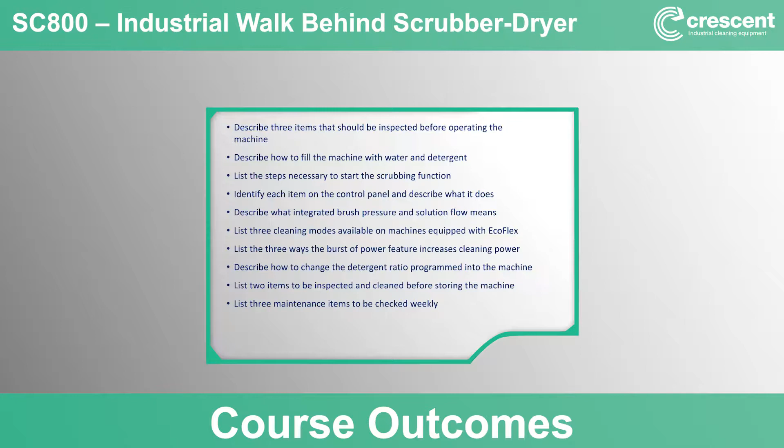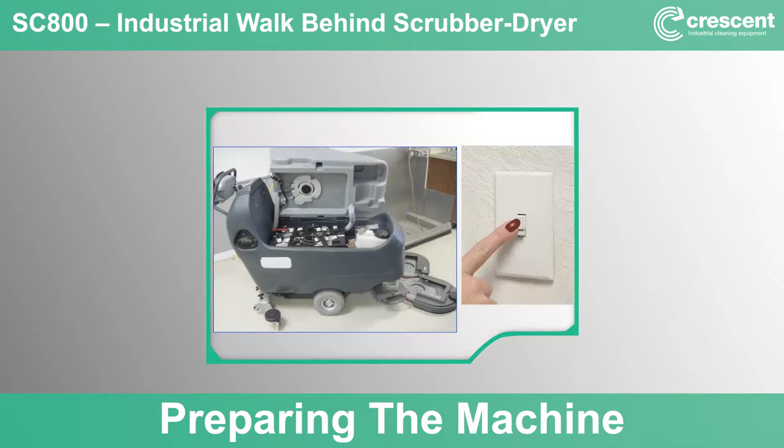Before one can begin using the machine, it has to be prepared for use. Let's start from the very beginning by turning on the light in the room in which the machine is stored. The first thing you should see is the machine parked with the recovery tank open, the battery charger plugged into the machine, the pad drivers or brushes laying nearby, and the squeegee hanging on the back of the machine. This is how the machine should have been left after it was used last.

The first step is to unplug the battery charger. If the machine is equipped with an onboard charger, the charger cord should be stored using the convenient cord wrap on the back of the machine. During charging, the recovery tank should be left open for air circulation. Now the recovery tank can be lowered to its normal operating position.

The next step is to inspect the pads or brushes. These should have been rinsed the last time the machine was used, so they should be relatively clean and free from any large debris. Inspect the pads or brushes for wear and determine if there is enough brush or pad life for the scrubbing you are about to complete. And if not, replace the pads or brushes as needed. Also make sure you have the correct pad or brush type for the scrubbing that needs to be performed.

Rev machines feature a fixed pad driver with hook material on the bottom of the pad driver. To install a pad, simply slide the pad under the deck and lift it up and press it onto the hook material. Do not remove the center section of the pad. When using the machine to remove floor finish, install a new red pad and then attach the double-sided Velcro, which is an option for the machine. Now the maroon pad could be attached to the red pad. The maroon pad should never be attached directly to the pad driver. This will damage the pad driver and it will have to be replaced.

To install the rev brush, follow the same procedure, but now the brush is going to be attached with threaded inserts. Lift the brush up and line up the fasteners on the brush with threaded inserts on the pad driver and attach it.

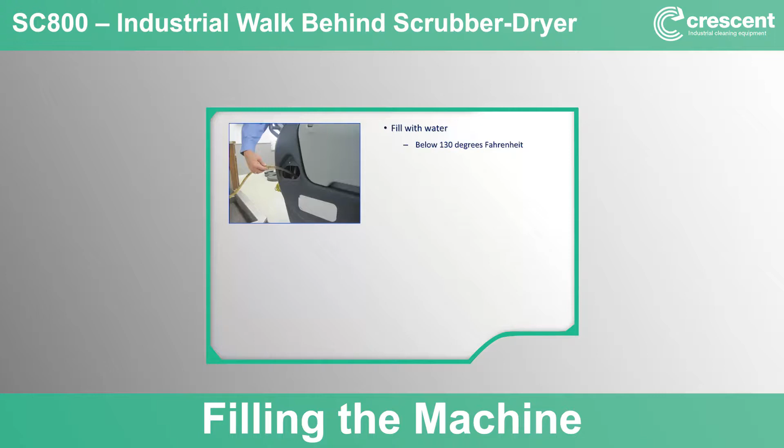On EcoFlex machines, fill the machine with clean water and then inspect the EcoFlex detergent cartridge. Verify the correct detergent is in the cartridge and there is enough detergent in the tank to complete the scrubbing task at hand. We are now ready to transport the machine to the area to be cleaned. Turn on the machine using the key and verify that the machine has enough battery power to complete the scrubbing task at hand. You can see this by using the control panel battery gauge.

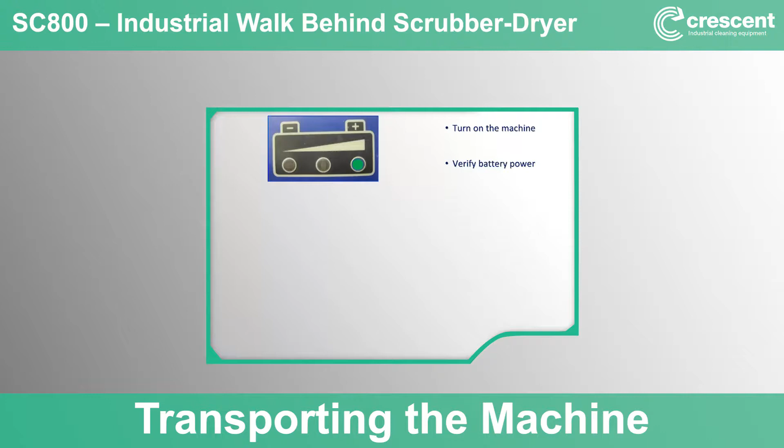The machine is controlled using the safety paddle system and a maximum speed control potentiometer. The potentiometer sets the maximum speed for both forward and reverse. Set the potentiometer about halfway between the slowest and fastest speed. The safety paddle system controls the direction and speed of the machine. Push the paddle forward to go forward and backward to go backward. The safety paddle system gives you variable speed control, meaning that the farther the paddle is pressed, the faster the machine will travel until the maximum speed is reached, which again was set with the maximum speed potentiometer.

The ST machines again feature a maximum speed control potentiometer, however they're controlled a little bit differently. On each side of the handle is a palm switch that engages the drive motor. These palm switches are not variable speed, they are simply on and off switches. Again, set the speed control at its middle position and press either the left or the right or both palm switches to go forward. To go in reverse, the small white reverse switch located on the top of the handlebar must be pressed while one of the palm switches is also pressed.

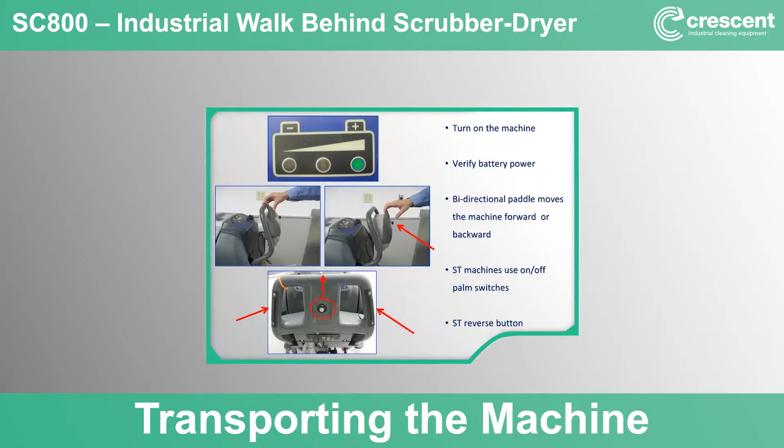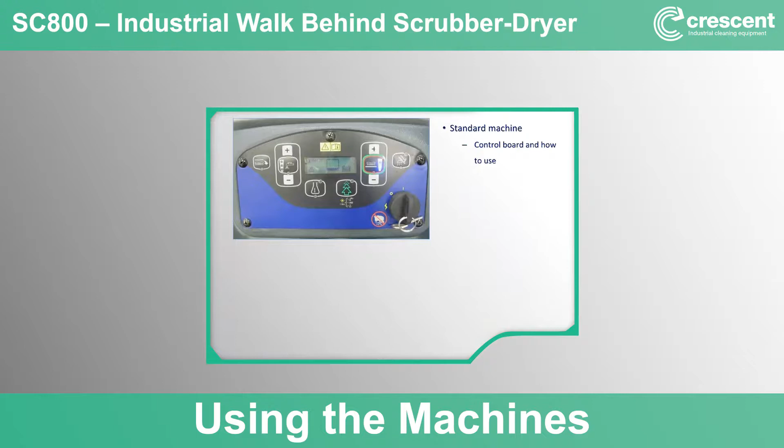Preparing the machine for use is the same for both the standard and ST machines. However, using the machines and the functions of the control boards are very different, so I'll cover them individually. I'll start by first describing the control board of the standard machine and then move on to the ST machine. The standard machine control board is equipped with a graphical display that shows at a quick glance some of the key information needed by the operator.

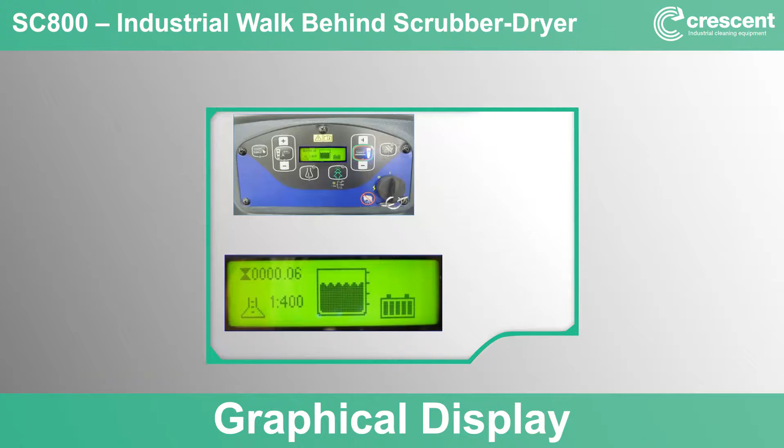Right in the center is the solution level display that shows the user how much clean water remains in the solution tank in 5 increments: full, 3/4 full, half full, quarter full, or empty. This can be useful to determine if the machine needs to be refilled before moving on to another area to be scrubbed. The battery gauge shows the amount of charge remaining in the battery pack. On EcoFlex machines, the current detergent dilution ratio is shown on the display.

The hour meter shows how many hours the machine has been used for scrubbing. And the machine has a complete diagnostic system, so any problems with the machine will be shown in the display with an error code. Under the recovery tank is a decal that gives some basic troubleshooting advice should an error occur.

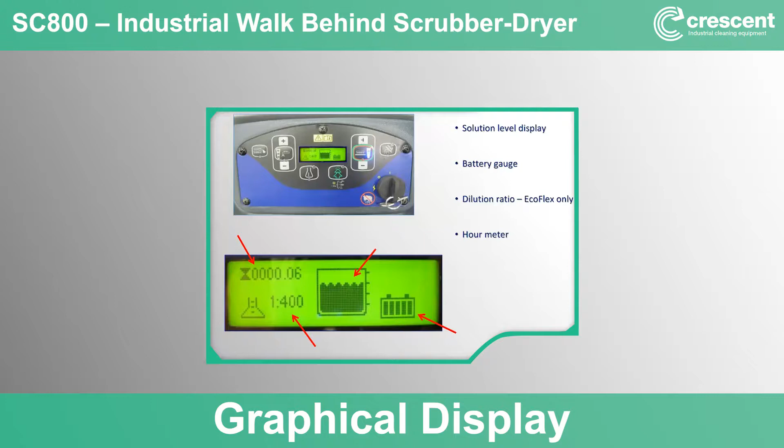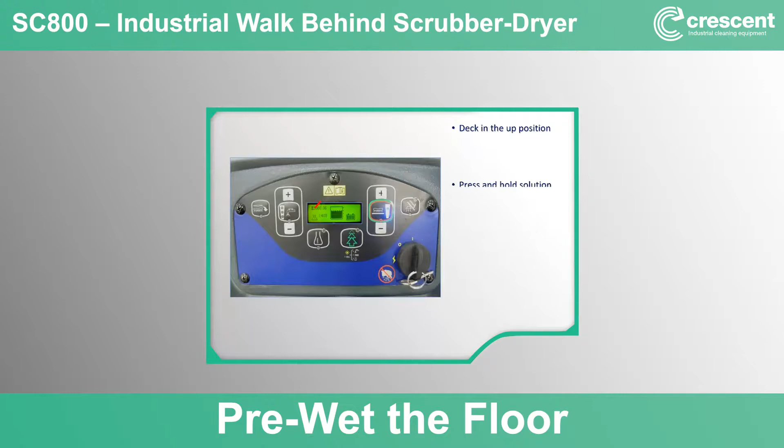To begin scrubbing with the machine, press and hold the solution on-off switch with the deck in the up position. This will dispense water to the floor to pre-wet the brushes and the floor, helping to prevent any donuts. The best practice to prevent any damage to the floor when starting or stopping scrubbing is to have the machine in motion slightly, then press the scrub on and off switch.

To make the standard and ST machines simple to use, they feature true one-touch scrubbing. The press of a single button both starts and stops the scrubbing function. The button is color-coded with both the green and red border, which makes it really easy to use. Everyone knows that green means go and red means stop.

To start scrubbing, press the true one-touch scrub button, which will lower the deck to the floor and prepare all systems for use. Then lower the rear squeegee. Depressing the safety paddle forward will start the actual scrubbing function. The machine will move forward, water will begin to flow, the brushes will begin to spin, and the vacuum will turn on. To pause scrubbing, release the paddle, and the machine, solution flow, and brushes will all stop.

The vacuum will stop after a 10-second delay to help clear any remaining water from the vacuum hose and prevent it dripping back on the clean floor. To stop scrubbing, simply press the one-touch scrub button again and the scrub deck will lift from the floor and the vacuum will shut off after a 10-second delay. Then raise the rear squeegee.

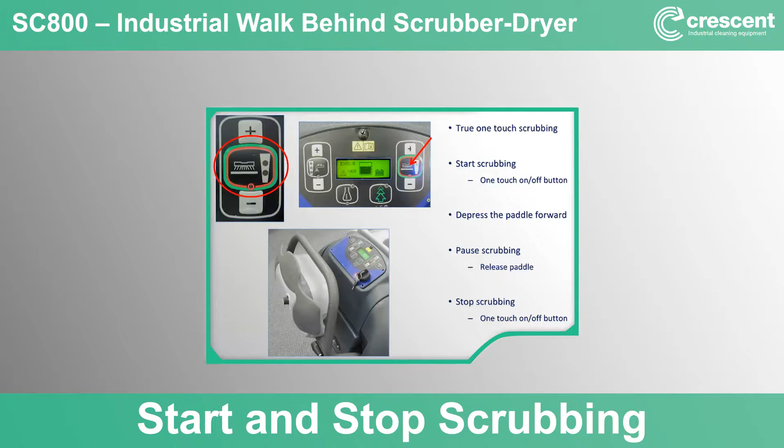You can easily adjust the cleaning power of the machine because it features integrated scrub pressure and solution flow rate control. Advance has taken the guesswork out of scrubbing through smart engineering. We've calibrated the correct combination of brush pressure and solution flow rate to clean regular and extreme soil loads on the floor. Regular scrub is indicated by one scrub pressure LED and one solution flow rate LED.

To clean extreme soil loads, you need extreme pressure and more water. Extreme scrub is indicated by lighting both scrub pressure LEDs and two solution flow rate LEDs. Now let's see how easy it is to change and adapt the scrub power to the varying soil loads on the floor.

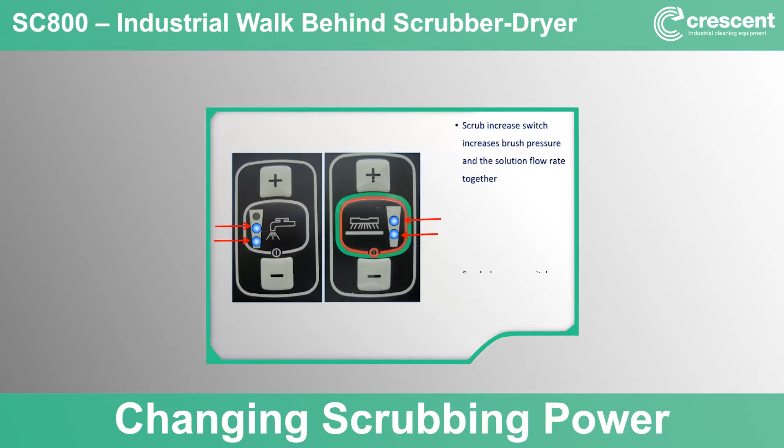To change from regular scrub to extreme scrub and back again is very simple. Simply press the scrub increase switch to increase cleaning power. When this is done, both the scrub pressure and the solution flow rate increase simultaneously. To decrease cleaning power and return to regular scrub mode, press the scrub decrease switch and the lowest scrub pressure and solution flow rate LEDs will now be lit.

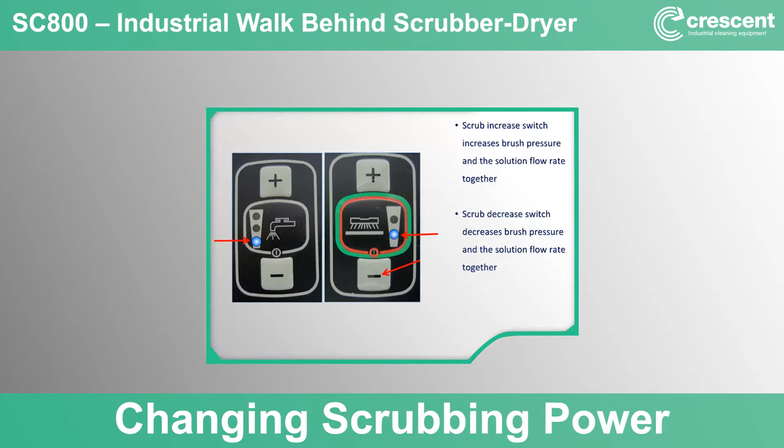Because Advance uses smart engineering and integrated scrub pressure and solution flow rate for you to clean different soil loads on the floor, there's seldom a need to adjust the solution flow rate independently. If the solution flow rate does need to be adjusted, it's simply a matter of pressing the solution flow rate increase switch or the solution flow rate decrease switch. Just like turning scrubbing on and off, you can also turn the water on and off. Pressing this button will turn the water either on or off.

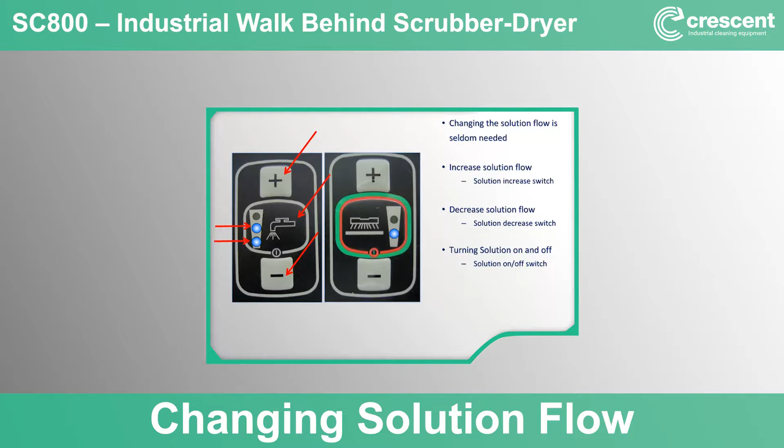The next two slides are for those machines equipped with the Advance EcoFlex system. If the machine is not equipped with the EcoFlex, the detergent on-off switch and the EcoFlex switch will not be active. The EcoFlex system is a flexible cleaning solution that meets all of your floor cleaning needs from green to clean. EcoFlex allows the use of plain water whenever and wherever possible for the lowest cost to clean with zero environmental impact from chemicals.

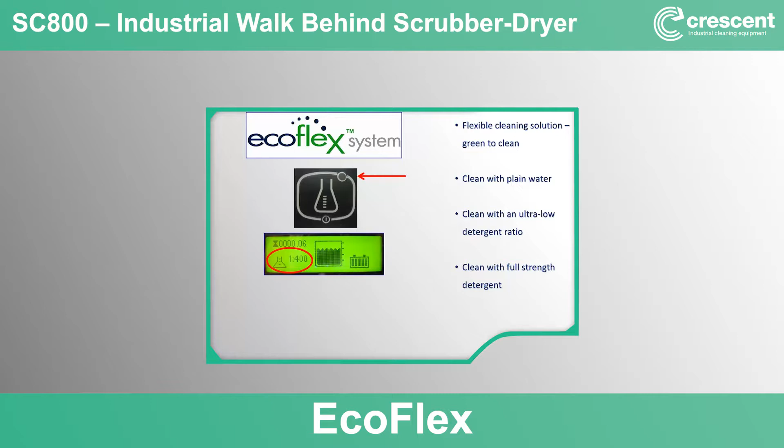EcoFlex has an ultra-low detergent dispensing mode that enhances the natural cleaning power of water while minimizing detergent costs and the environmental impact from chemicals. EcoFlex gives you the flexibility to clean with detergent at full strength if that's required. And on top of all that, there's a burst of cleaning power at your fingertips for tough soils found in smaller areas to clean. Now let's see how easy it is to clean from green to clean.

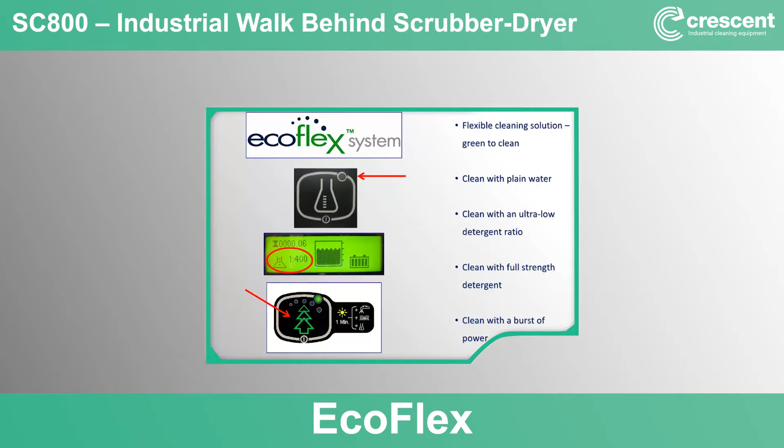Cleaning with plain water. Every Advance scrubber with an onboard detergent system has a detergent on-off switch. This gives you the flexibility to turn detergent off and clean with plain water, or turn detergent on and increase the cleaning performance, and it's all done with the touch of a button.

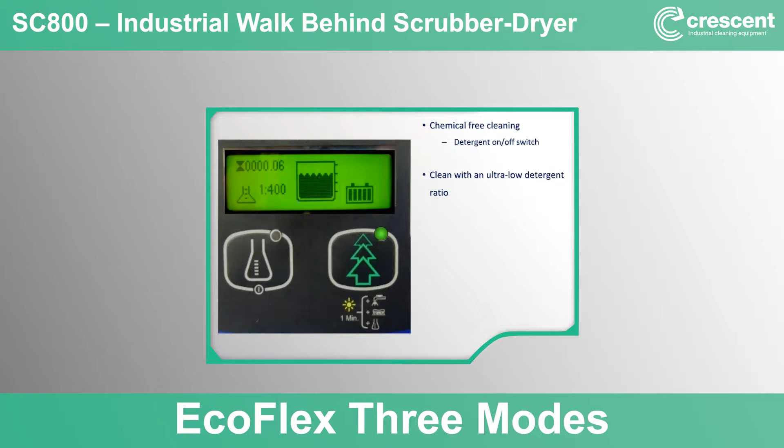Cleaning with an ultra-low detergent ratio. Some areas might require a bit more cleaning power than pure water can deliver. Water cleans pretty well, but using a little bit of detergent enhances the natural cleaning power of water and makes it a more powerful cleaner. In most cases, when detergent is turned on, the machine will dispense at a ratio of 400:1. This is the ultra-low detergent mode. 400:1 will be shown in the graphical display.

Cleaning with full-strength detergent. Switching to full-strength detergent for the heaviest of soil loads on the floor is very easy. Press and hold the EcoFlex switch for 2 seconds. You'll see the ratio change on the graphical display from 400:1 to the ratio that's been programmed into the machine. You'll also see the EcoFlex LED be extinguished.

Note that the machine will continue to dispense at the ratio that's programmed into the machine until the EcoFlex switch is pressed again. So how does one take advantage of this flexibility? Well, let's take scrubbing a high school as an example. Many areas in a school are simply being damp mopped with the machine. In these areas, take advantage of cleaning with plain water for the lowest cost to clean with zero environmental impact from chemicals. When the machine approaches a slightly dirtier area, turn detergent on.

When encountering a severe dirty area like a cafeteria, press and hold the EcoFlex switch and clean with full-strength detergent. After the cafeteria is cleaned, one can switch back to the ultra-low detergent cleaning mode or go back to plain water. Some follow a cleaning routine where the school is scrubbed Tuesday and Thursday with plain water or in the ultra-low detergent mode, and then cleaned Monday, Wednesday, and Friday using full-strength detergent. A cleaning schedule like this will reduce the overall detergent consumption, saving money and the environment.

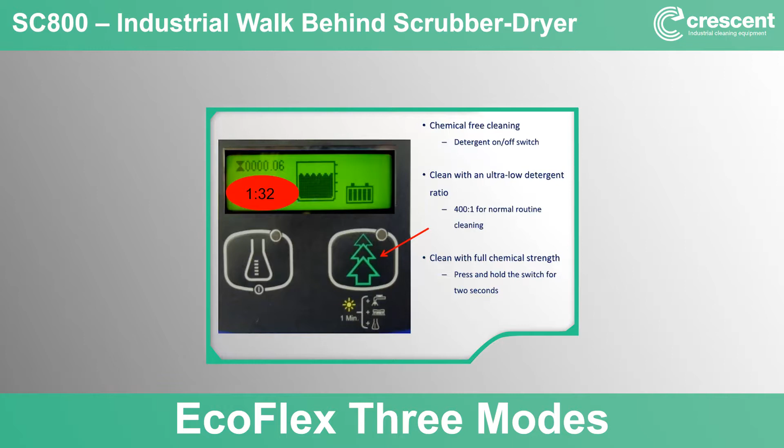Now let's see how the burst of power makes spot cleaning in areas super easy. EcoFlex provides the flexibility needed to clean from green to clean. The flexibility to clean green and in the most environmentally responsible way by using plain water. The flexibility to use detergent sparingly for slightly dirtier areas and to engage full-strength detergent only where and only when it's needed. Now let's look at the flexibility the burst of power feature brings us.

For smaller, dirtier areas, the operator can easily and temporarily increase the cleaning power of the machine for 60 seconds by simply pressing a single button. This can be used to call up additional cleaning power when needed, such as when cleaning up the spill that has now dried onto the floor, or maybe the front entryway to a hospital has become extra dirty and more cleaning power is needed to get it clean.

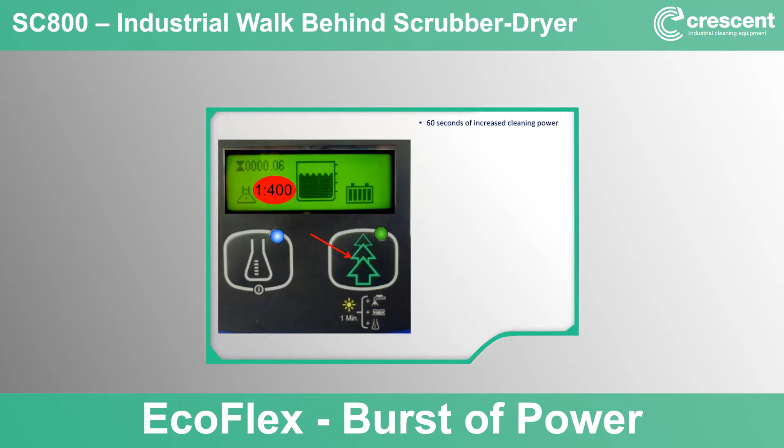The burst of power temporarily increases cleaning power for 60 seconds in 3 ways. It increases the detergent strength to full detergent strength. It increases brush pressure 1 level, and it increases the solution flow rate by 1 level. During this timed interval, the LED on the switch will blink. It blinks slowly at first for the first 50 seconds and then blinks fast for the last 10 seconds, indicating the burst of power will soon end.

After 60 seconds, the machine automatically reverts back to the original detergent dilution ratio, brush pressure, and solution flow rate prior to engaging the burst of power. One thing to note is that to clean a dirtier area, we all know that more detergent, brush pressure, and solution is needed. That being the case, if the operator was cleaning with plain water, tapping the burst of power button will turn detergent on for the 60-second period, and then it will turn detergent off again after the burst of power has expired.

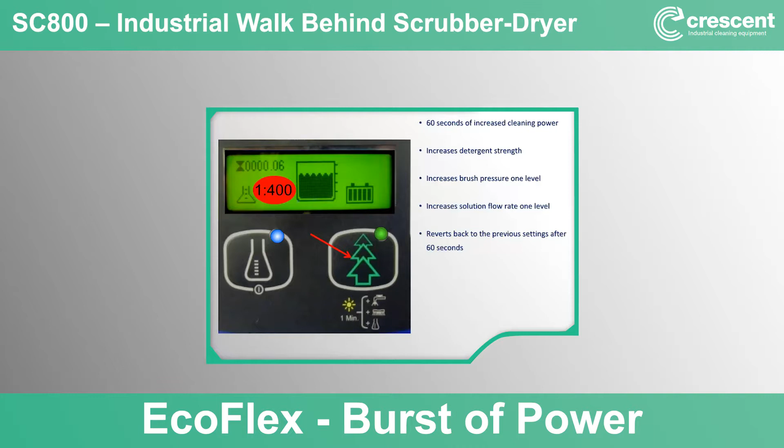I mentioned it a few times that the machine will dispense detergent at a full strength detergent ratio, or the ratio that's programmed into the machine, rather than 400:1. It does this by either pressing and holding the EcoFlex switch for 2 seconds, or when scrubbing with the burst of power function. Now let's look at how the full strength detergent ratio is programmed into the machine. Every manufacturer of auto scrubber approved detergent will provide a suggested dilution ratio. Some state it as a ratio such as 128:1, or they'll state it in ounces per gallon, such as 1 ounce per gallon. Some may even use a percentage, like 0.8%.

The first step is to know the suggested dilution ratio. If it's stated right on the label, great. If not, look at the suggested ounces per gallon or percentage and cross-reference that to a ratio. Now that we know that ratio, we can program the machine. With the machine on, turn detergent off using the detergent on-off switch. Press and hold the detergent on-off switch for 2 seconds.

At this point, the detergent LED will begin to flash, indicating you've entered the change mode. Now tap the detergent on-off switch and watch the graphical display toggle through the available dilution ratios. Stop and release the on-off switch once the desired ratio is displayed, and after 2 seconds, the ratio selected is locked into the machine. It couldn't be easier.

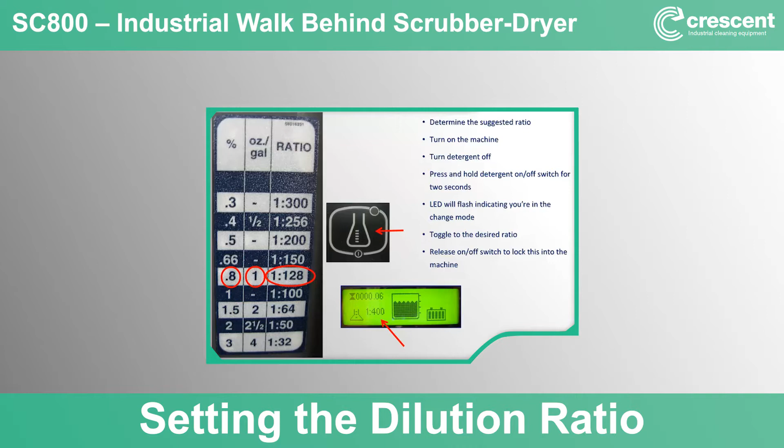Now let's look at the last 2 switches located on the standard machine's control panel. The first is the click-off brush switch. With the deck in the up position, pressing this button will cause the brushes to spin momentarily and then stop abruptly. This will dislodge the brushes or pad drivers from the clutch plate. This makes it super easy to remove the brushes and allows you to grab the clean top side of the brush or pad rather than the dirty underside.

The vacuum wand switch is used to either use the machine as a large wet vacuum or to use the optional off-aisle wand. In some cases, such as a flood from a broken water pipe, or just to pick up water on the floor, the machine can be used as a large wet vacuum, and either the rear squeegee can be used, or the optional scrub and vacuum tool can be used to pick up water from the floor. Pressing the vacuum wand on-off switch will turn the vacuum motor either on or off.

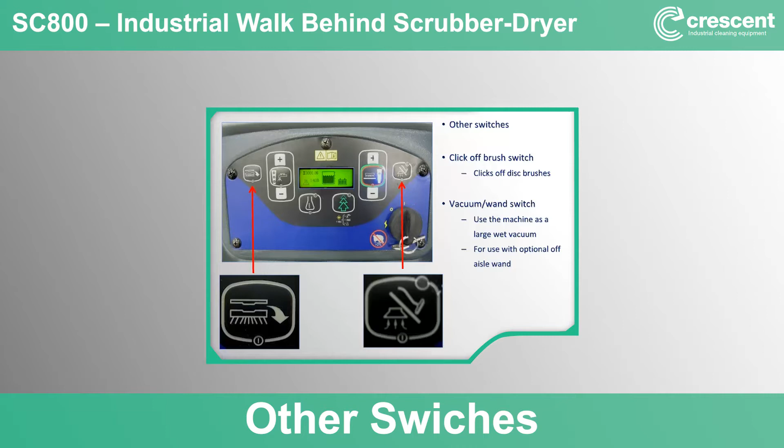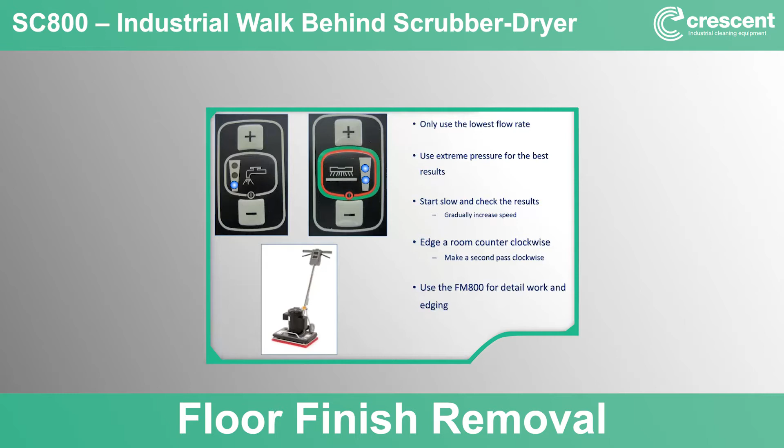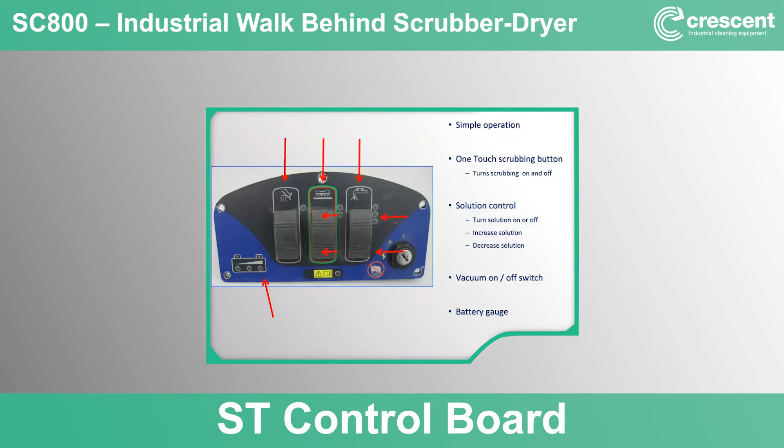To start scrubbing, press the green Scrub On toggle switch to lower the scrub head to the floor. Lower the rear squeegee to the floor. Pressing either palm switch will cause the machine to move forward, water to be dispensed, and the brushes will begin to turn, and the vacuum will turn on. To pause scrubbing, simply release both palm switches and the solution flow rate and brushes will stop. The vacuum will stop after a 10-second delay to help clear the vacuum hose and squeegee of any remaining water.

The machine can easily be adjusted to clean regular or extremely dirty floors. While in the regular scrub mode, simply press the top side of the scrub switch to engage extreme scrub pressure and increase the solution flow rate. Pressing the bottom side of the scrub switch will return the machine to regular scrub mode. Pressing the switch again will stop the scrubbing function.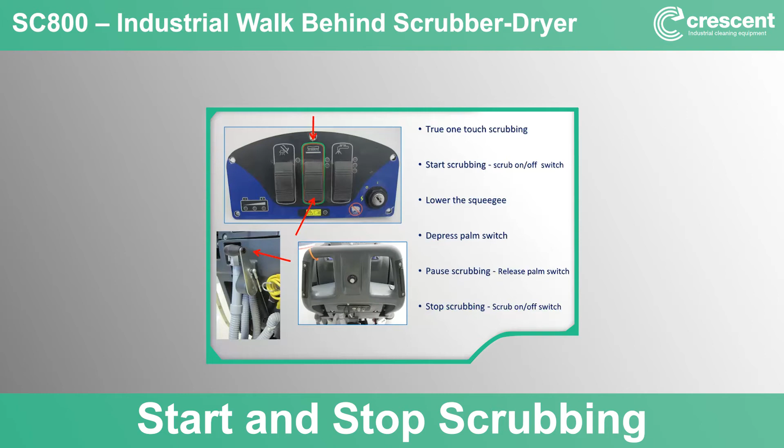Eventually the solution tank will run dry and the recovery tank will become full. Both the standard and ST machines have a ball float valve that protects the vacuum motor from ingesting water. Once the ball float valve activates, the vacuum motor pitch will change to a much higher pitched sound. When the recovery tank is full, transport the machine to a suitable location to empty it and refill the machine as required.

After using the machine for a while, one of two things may happen. The first is that the battery becomes depleted and the machine must be recharged. When this happens, the battery gauge will indicate the batteries need to be recharged and all scrubbing functions will cease. The machine stops scrubbing when the battery pack has become depleted, but the transport function does not. This means you will always have plenty of battery power to transport the machine to the area to empty it and also back to the charging station.

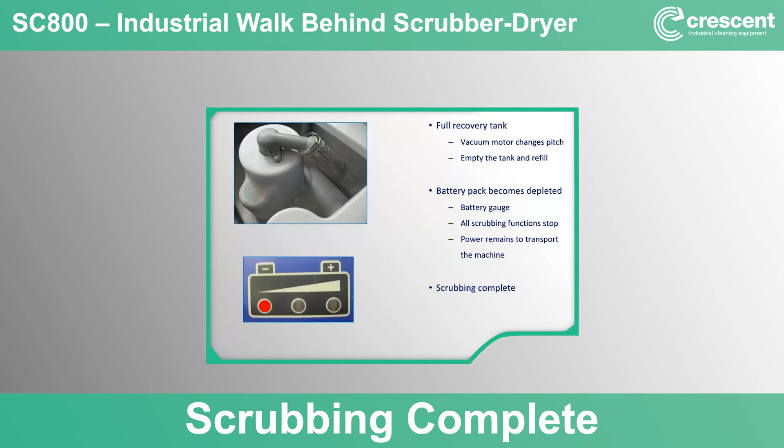The other thing that may occur is that all areas of the facility that need scrubbing are now scrubbed and clean and the machine is ready to be put away until it's needed again. Just like we learned earlier about preparing the machine for scrubbing, we are now going to do the opposite procedure and prepare the machine for storage. The first thing to do is to empty the recovery tank and rinse it out thoroughly to remove any and all debris from the tank.

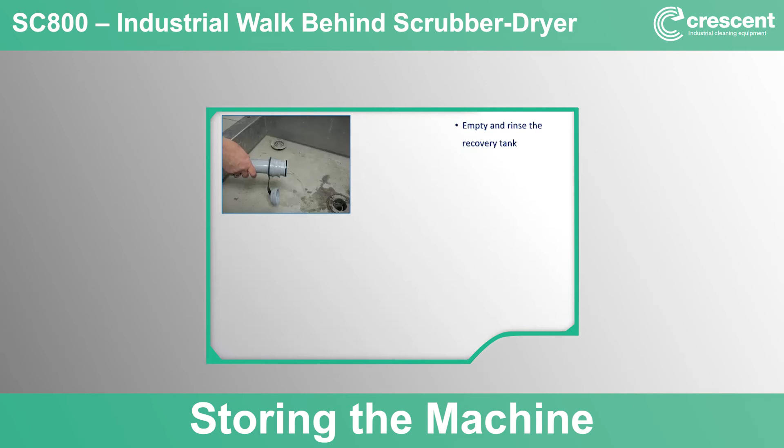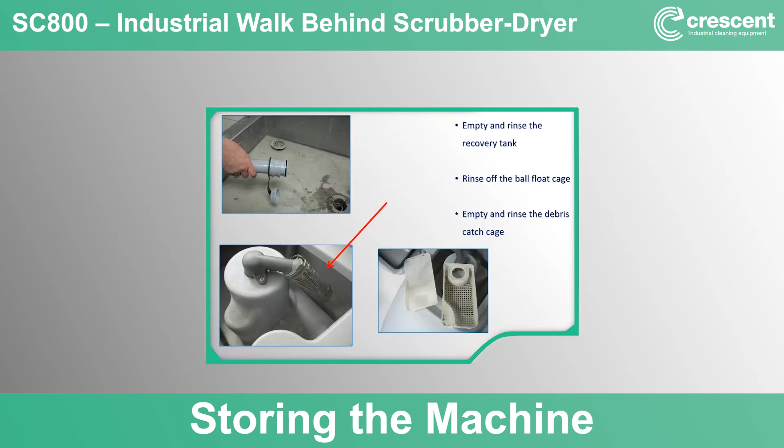While you're at it, rinse off the ball float cage and make sure it's cleaned off. Remove the debris catch cage, empty it, and rinse it out if the machine is so equipped. Remove the vacuum fan filter and clean it off. The filter is washable. Once done, set it on the holder to dry out. Now you can rinse off the squeegee and inspect it to make sure the blades are not ripped or torn. If they need to be changed or replaced, do that now. Hang the squeegee on the integrated squeegee hanger.

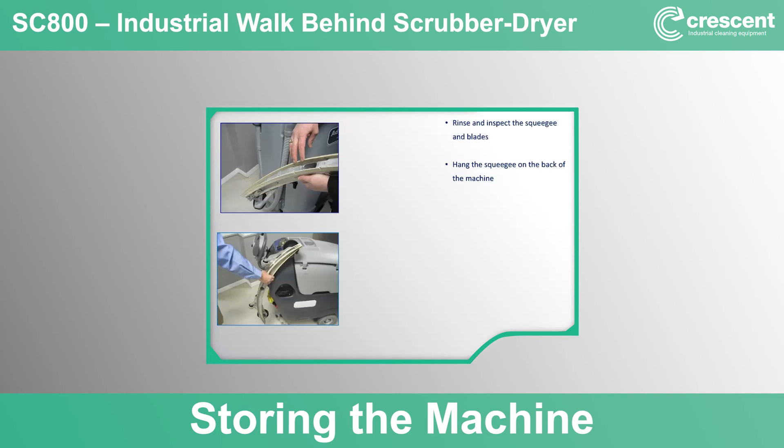Remove the brush deck skirts on the disc machine and take off the brushes or pad drivers and rinse them off and remove any large debris that may be present. Inspect the pads or brushes and see if the pads need to be changed or flipped, and see if the brushes need to be replaced. If they do, do that now and set them aside to dry. If you have a cylindrical machine, remove the brushes and inspect them for any large debris and rinse them off and set them aside to dry. Remove the hopper from behind the scrub deck, empty it, and rinse that too.

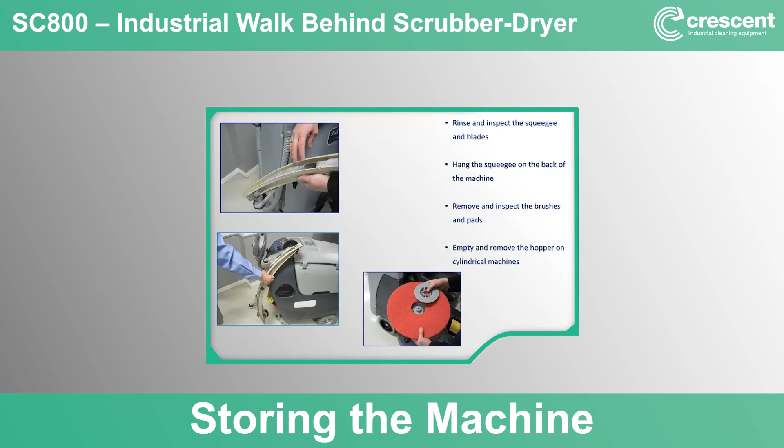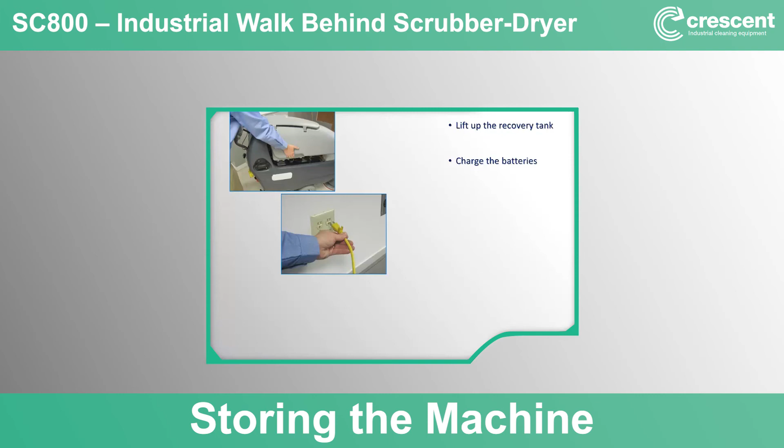Lift up the recovery tank into its storage position. Now you can plug the battery pack into the charger and charge the batteries for the next person who needs to use the machine. It's also a good idea to take a wet rag and clean off the exterior of the machine. And remember, turn off the light when you leave the room.

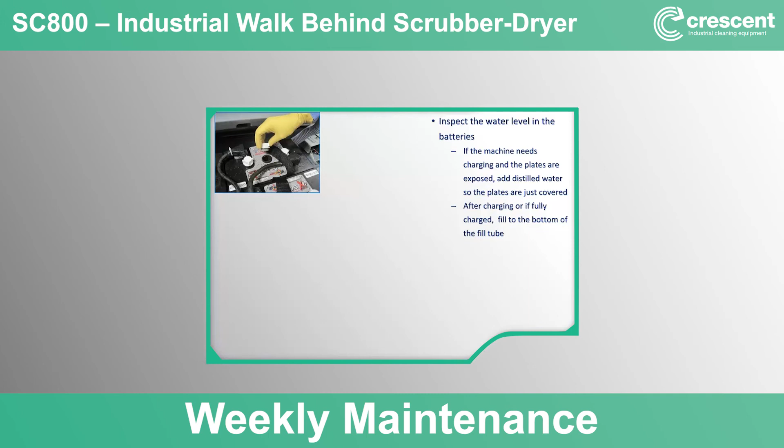Besides daily maintenance, there's also maintenance required periodically. Once a week, one should check the water level of each battery cell and add distilled water as needed. The machine should not be charged if the plates are not underwater. Before charging, inspect the cells and make sure none of the plates are exposed. If they are, then add just enough water to cover the plates, but do not fill the cell all the way up until the machine is fully charged. If the machine is fully charged, then add water so it touches the bottom of the fill tube in each cell. Do not fill the cell all the way to the top of the battery. Inspect and clean the solution filter, and purge the EcoFlex system with plain warm water.

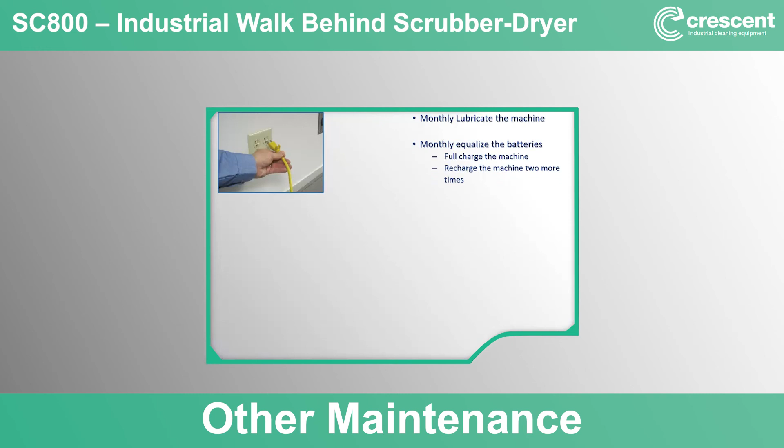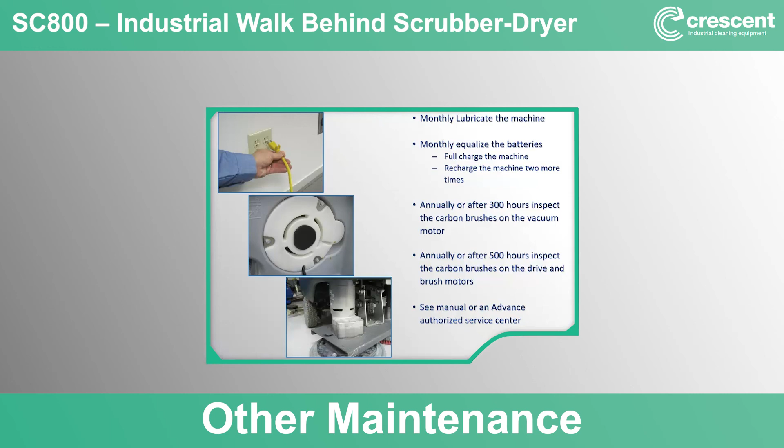The machine should be lubricated monthly. Monthly, the battery pack should be equalized. Equalizing the battery pack ensures each cell is at its maximum charge potential for maximum runtime. This is done by fully charging the machine and then unplugging it. After a minute or two, plug the machine back in to charge it again, and repeat this one more time. After 1 year or 300 hours, the carbon brushes on the vacuum motor should be inspected for wear. After 1 year or 500 hours, the carbon brushes for both the drive motor and the scrub motor should be inspected for wear. Refer to the operator's manual or an authorized Advance service center on lubrication and carbon brush inspection and replacement.